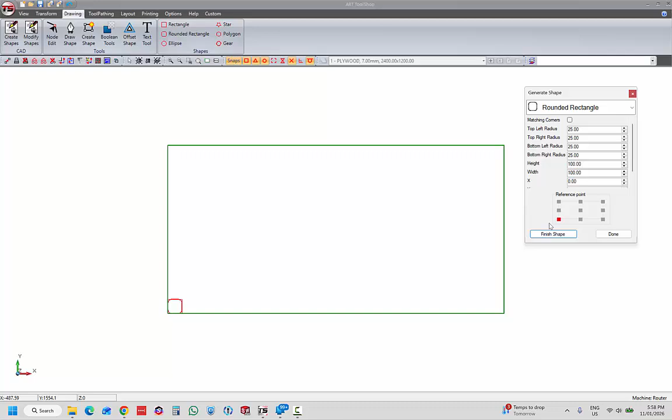Clicking the icon here opens the Rounded Rectangle dialog. First, click New Shape to create a rounded rectangle on the screen. Don't worry about the dimensions yet. If you wish to get a better view, simply point the mouse at the center of the square and scroll your mouse wheel to zoom in or out.

Next, click Matching Corners so all corners of the flange have the same radius. Now change the corner radius to 10 millimeters. This will round all corners of the rectangle to the same radius.

The anchor point setting determines which corner of the rectangle aligns with the location referenced in the position boxes above. In this case, I'll align the bottom left corner of the rectangle to the origin of the sheet by leaving the coordinates at 0 for both x and y. I'm doing this to make it easier to position the bolt holes. Clicking Finish Shape will complete the process.

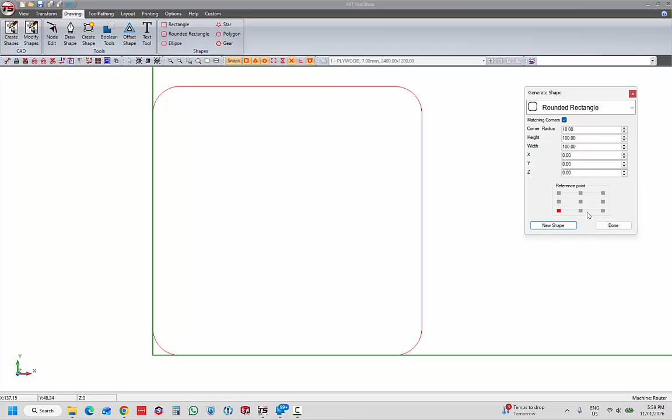Now I'm going to add a center drain hole with a diameter of 25 millimeters. I'll select the Circle/Ellipse tool. If the dialog box is still open, I can simply change the shape type to ellipse using the drop-down menu.

Clicking New Shape adds the circle to the screen. If it already closed the Shape dialog box, I could select Ellipse again from the drawing toolbar. Select the Maintain Ratio checkbox to ensure we get a perfect circle rather than an oval.

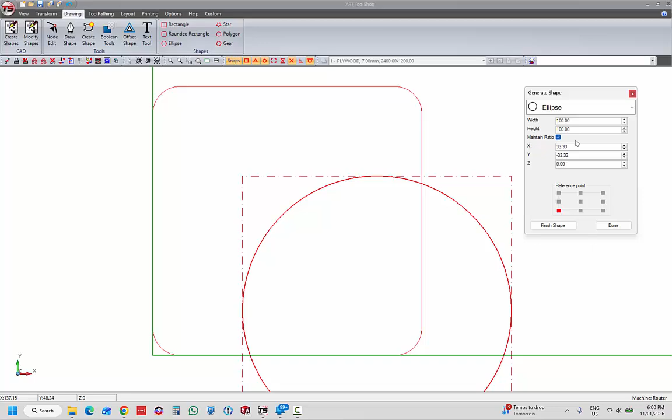This time, I'll select the center node as the anchor point because I want the center of the circle to be 50 millimeters from the left and 50 millimeters from the bottom. Because I drew the square at the 0,0 coordinate, it's easy to position the circle accurately. Once the parameters are correct, click Finish Shape.

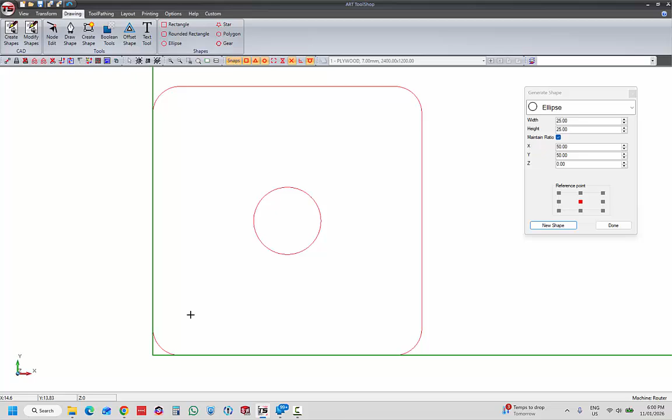Next, I'm going to add a bolt hole in one corner. We'll make the circle 12 millimeters in diameter and position the center 15 millimeters in from the bottom and left sides using the x and y coordinates. Then click Finish Shape. Now I'm going to make copies of the hole for each corner.

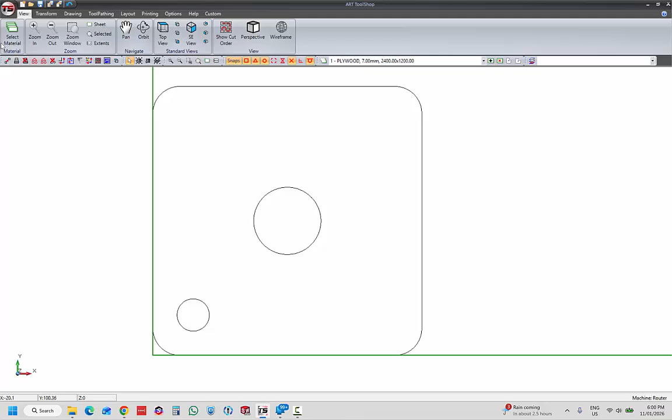For this, I'll use the Rotate function. First, choose the Select tool from the toolbar. With the Select tool, you can either click the edge of the bolt hole or drag a selection box around it. Once the circle is selected, go to the Transform menu and choose Rotate.

Now we'll create duplicates of the bolt hole at each 90-degree rotation. Enter the rotation point as 50 millimeters on the x-axis and 50 millimeters on the y-axis. This is the center point of our square. Then enter the rotation angle as 90 degrees.

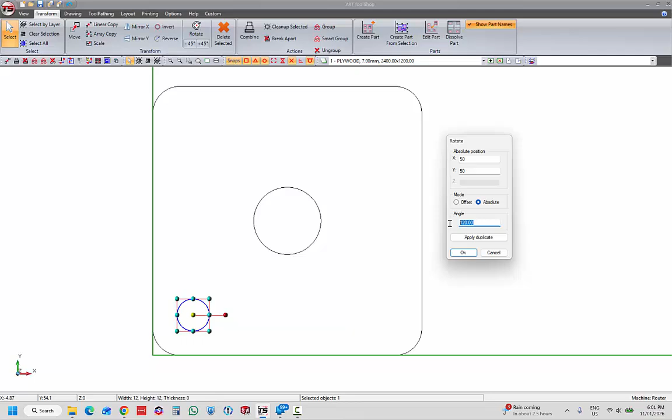Clicking Apply duplicate will keep the original hole and create a copy at the desired rotation angle. Repeat this until all 4 holes are created. Then click Cancel to exit the Rotate function. Now we have our custom flange fully drawn.

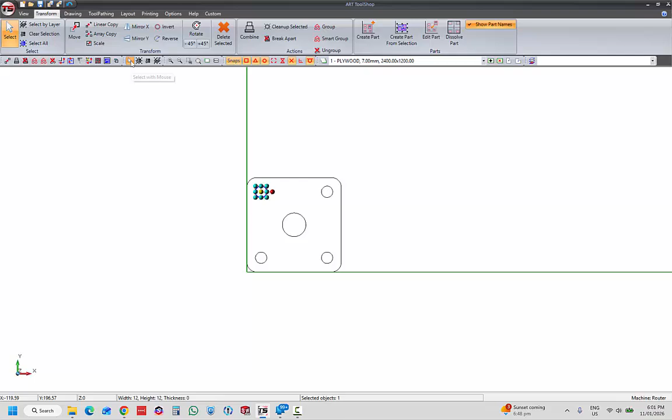Finally, I'll use the Select tool to select the flange and move it away from the corner so it's easier to see. Once the flange is selected, you can drag it by the center node with the mouse. If I want to move the flange to a specific location, I can use the Move function on the Transform toolbar. This will apply to all selected objects.

First, we choose the anchor point. In this case, I'm going to select the lower left corner of the flange. I'm going to leave the mode set as Absolute because I want to specify the position on the sheet. If I wanted to move it a certain distance from its previous location, then I would have selected the Offset mode. Finally, I will enter the coordinates for the position I want to move the anchor point to. In this case, I'll enter 20 millimeters for X and 20 millimeters for Y and click OK to finish.